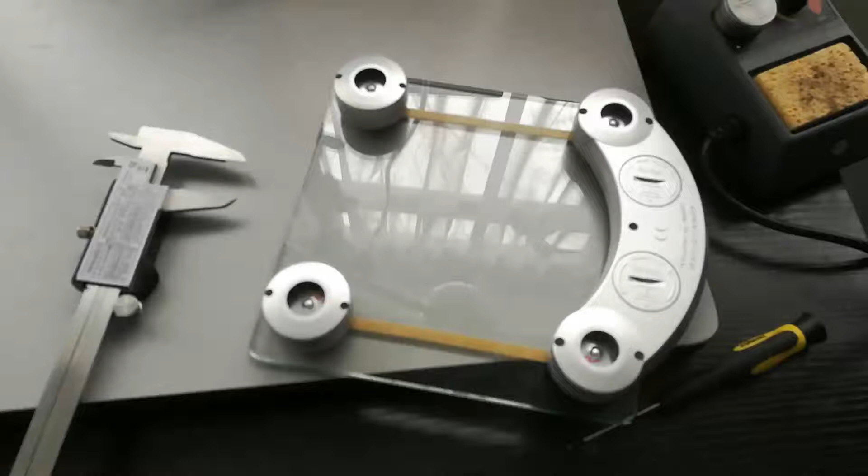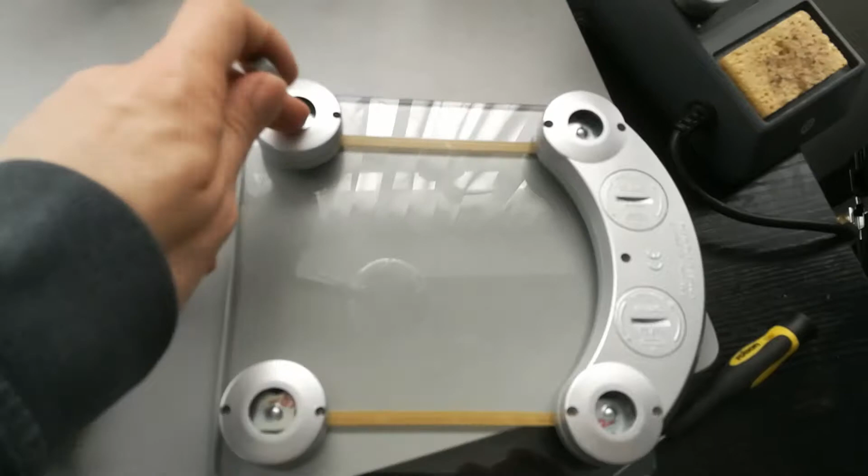Right, and aside from the other stuff I was doing, we've got a damaged set of scales here. These legs have fallen off, and they're supposed to go in these holes, and supposed to be basically a cylinder, pushes down on that stud and actually registers the weight. Now, there is actually a metal disc, and then there's this.

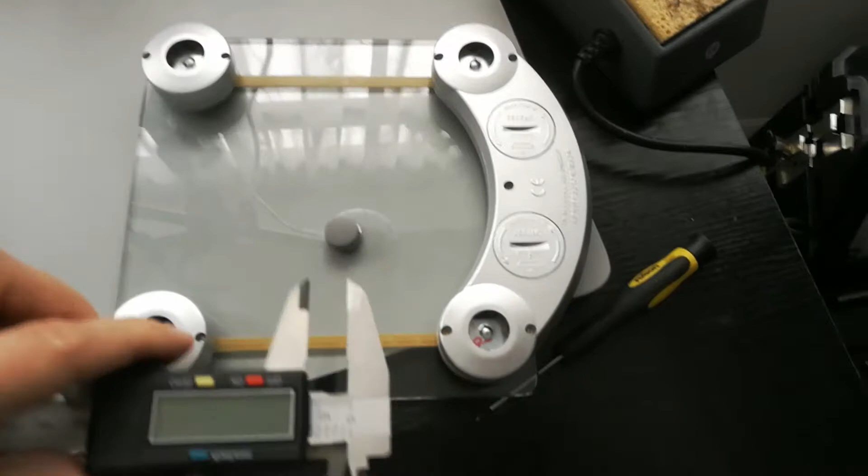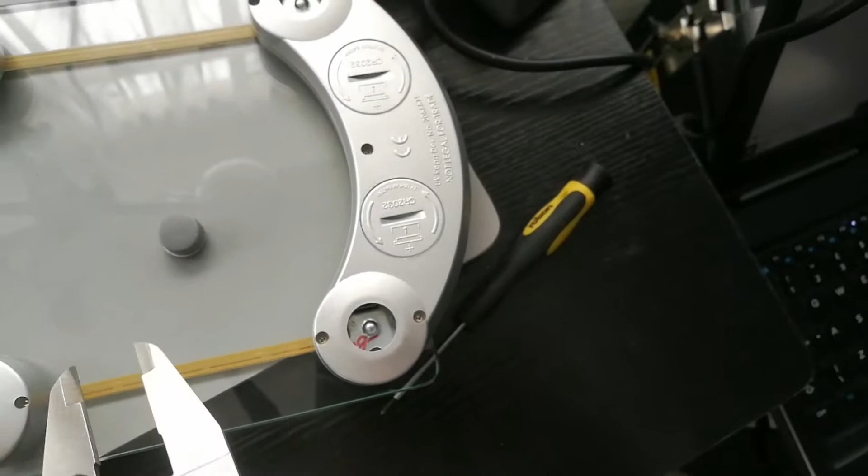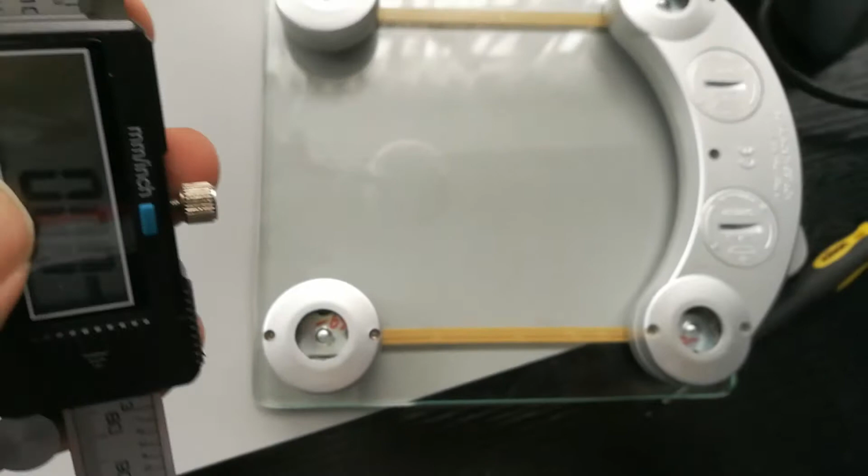So what I've done is I've used these as, well, actually I've just used them as dumb calipers really. I wasn't needing massive precision to get basically the width of this, which came out as, I think it was 15, and the height of that, which came out at around about 8, I think, that plus the disc here. And once I'd gotten the width and the height of these, so that's coming out around about just under 10 millimeters, and this was the retaining clip that went under there.

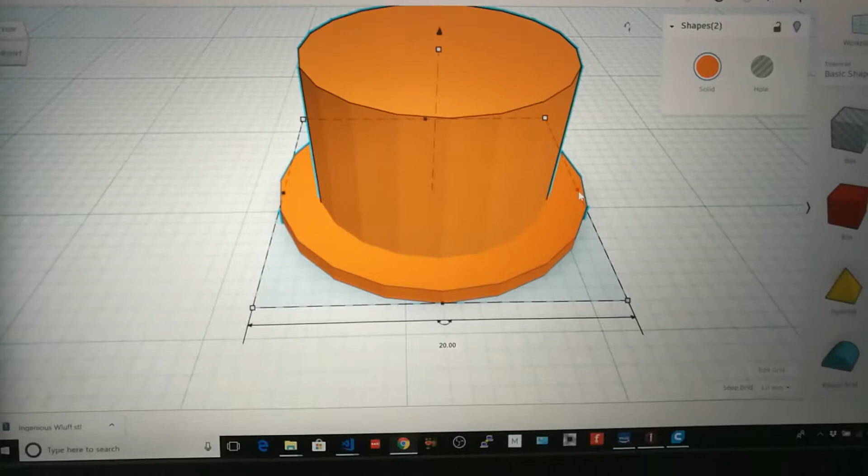Then I was able to go and just throw this into Tinkercad, where I can just use 2 cylinders. I can use the alignment tool to go and align them in the same positions, and can also use these for dimensioning. So 10 millimeters. We've got the 20 millimeter base under there. I can then take this and hit the export button, export it as an STL, and actually this is my second export now.

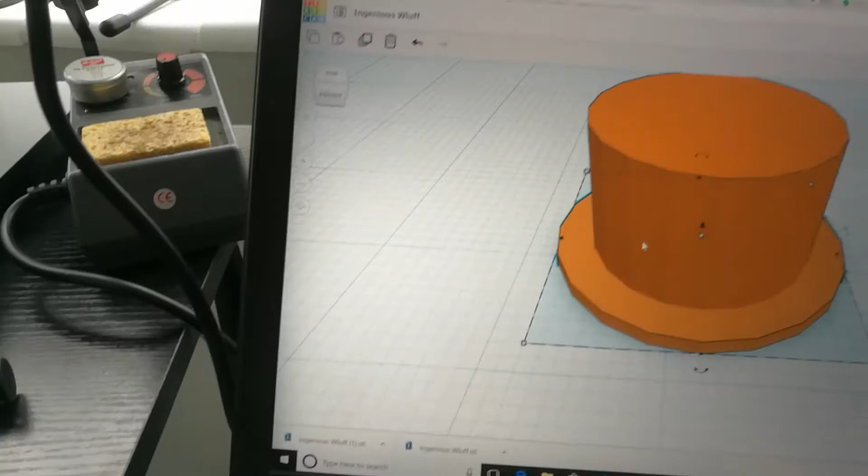The thing is, got to make sure I've got both selected when I export, otherwise it'll only actually export one of them. So just a bit of a gotcha, so I'm going to have to control and click to select both of them. I think I've got both, yeah, I've got both. Okay, let's do the export again.

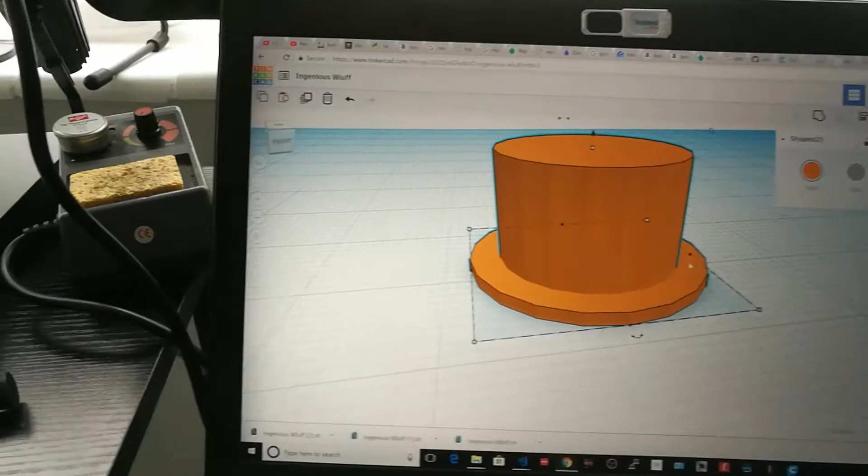And I love the names it's making. It's called it Ingenious Wuff. Okay, it's this file here, so we'll show in folder. And let's just delete the first one and delete this other attempt where I exported. Okay, and I'm going to drop it into Cura because although I'm experimenting with ideaMaker, let's get rid of this one that was a fail earlier. And I'm going to slice and print that.